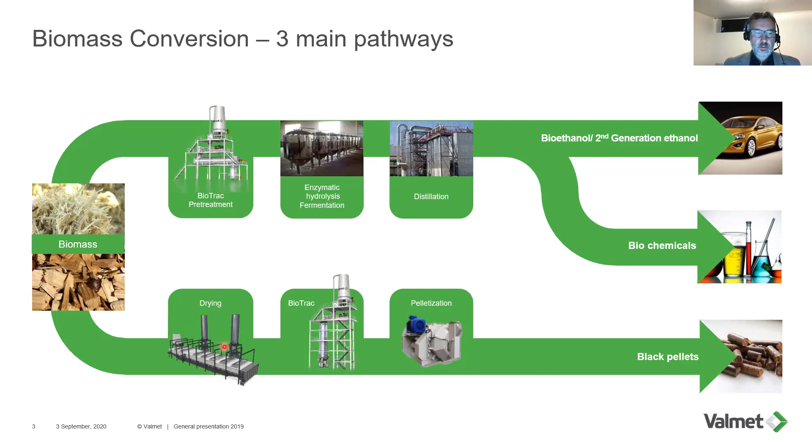I will not go into detail on the process differences between these areas, but I just want to outline some differences in how we work. In bioethanol and biochemicals, we collaborate with technology providers who have developed and scaled up their own process from R&D phase to full scale, and we deliver part of the technical solutions to fit and implement their process. On the opposite side, for black pellets, we can propose end-to-end solutions, and we can act in most cases as process supplier and equipment supplier from log infeed to final delivery.

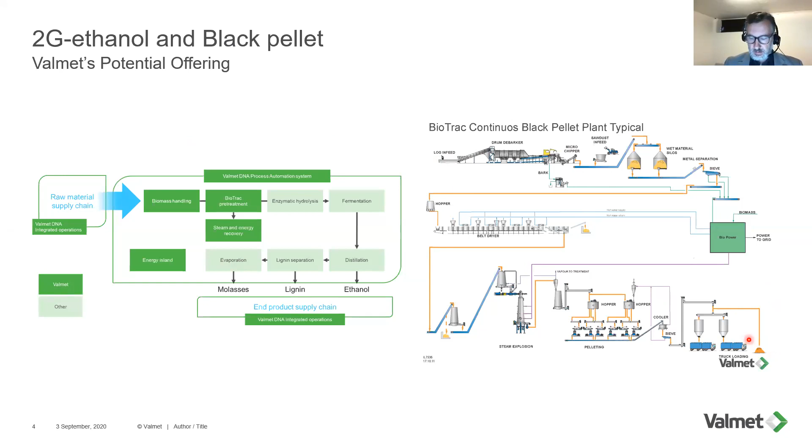In both cases, we have developed our technology from what we use within pulping and fiberboard. We have a long experience of pretreatment of biomass, more than 100 years actually, and already in the 20s, Arne Asplund worked with William Mason, who developed steam explosion and the steam gun. Arne Asplund further developed the technology for fiberboard and mechanical pulping.

So for wood-based applications, we have hundreds of references in pulping, mechanical pulping, fiberboard, and so on. But a part of Valmet which is perhaps less known, and has been very valuable for us, is our background in non-wood pulping. Here you can see a non-wood pulping line - I mean pulp production from straw, from bagasse, from agro residues. We're actually world leader with more than 50 references.

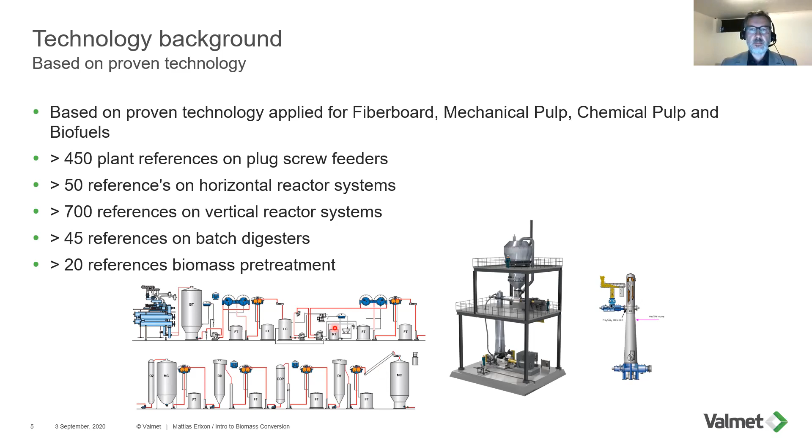This gave us good insight into challenges with this type of material, which were perhaps not known by everybody. Since about 2010, we have a reference list of more than 15 to 20 systems, and even older references from the 80s and earlier. Our strategy has been to grow slowly together with our customers to mitigate risk and secure quality. So the list of deliveries ranges from pilot scale and demo scale, to now commercial scale systems under delivery. This strategy was strongly related to the challenges, but also the opportunities we identified in this area.

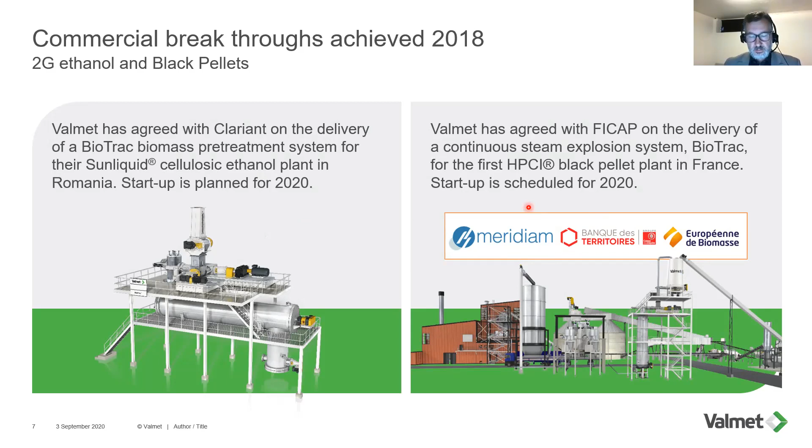All this development that was done the last 10 years, but also the last 50 years I would say, resulted in 2018 in our two first full-scale references. The first one is a bioethanol mill in Romania, whereas the second one is a steam explosion system for black pellets. These two are typical examples of a scale-up that has been done by Valmet, by our partners, and by our customer.

And it's a long trip, and we saw a lot of opportunity and challenge in this. So for Valmet, bioapplications open, of course, new opportunities, but we have also identified challenges. So it's perhaps the challenges that open the opportunities for Valmet, as we can give added value to our customer and to the project.

And when talking about scale up of new research, the focus is often put on technical challenges, but there are also other types of challenge that can be important to handle, and I will start with this other type of challenge.

The first one we identify is cultural challenge, and Valmet is a global company. We're used to work in a global market, and we have Valmet people all around the world who support us and help us in all the countries we are working. But for some companies, this can be more difficult to work internationally. One thing that complicates the game is that you have much more stakeholders involved in these projects.

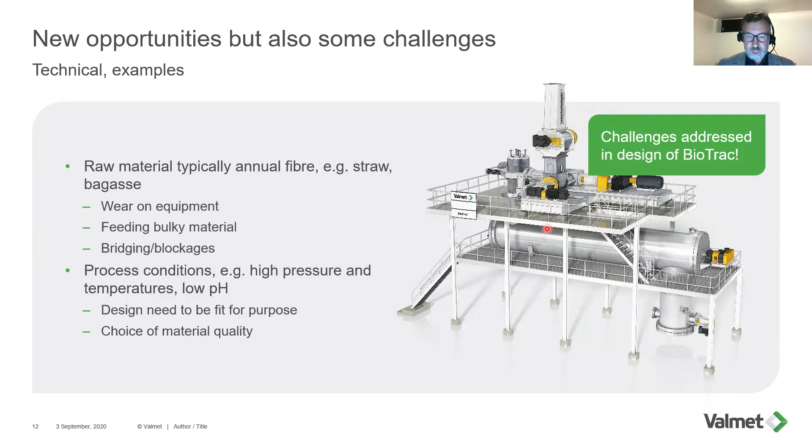However, equipment is not the first thing people think about when they develop and scale up a new process. Suppliers are often involved in the late phase of the project. It's perhaps not necessary in the early R&D phase, but as soon as the developer starts to think about applications, they should have a parallel process on how they will scale up their process. They should secure that equipment exists or is easy to adapt.

Optimization of process at small scale or pilot scale is often done with focus on yield and product properties, mass and energy balance - not on implementation at full scale, and not so often on equipment design or integration with other equipment. So this could be a challenge also if it is addressed too late.

What we can also see is that focus is put on what people think is most important, or perhaps on what people think is most interesting. And what we often hear is the word non-technology for what is outside the core process. At this stage, I think when speaking about non-technology, it's important to consider if it's really non-technology, or if this technology also needs to be adapted, upscaled, based on new premises and new materials.

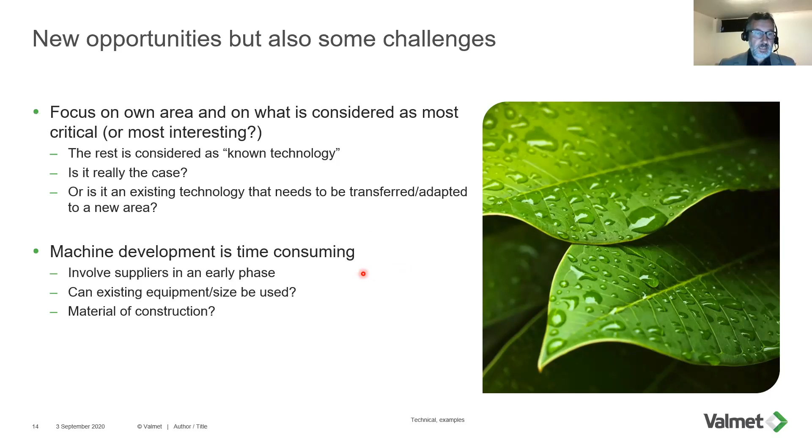An example of our upscaling is the feeding of straw or non-wood agrofiber to a reactor. To feed straw into a digester is considered to be a non-technology for non-wood pulping. But there are also differences between non-wood pulping and ethanol. An ethanol mill has a production that can be up to 3-4 times the production of a non-wood pulping line, and the pressure in the reactor is much higher.

And if you do it in the wrong way, there is a big risk for blowback also. The technology is however quite similar to what is used in mechanical pulping of fiberboard, for example - it's plug screw feeder based feeding. But there are few actors that actually know how to feed straw or bagasse in a proper way. And as a global actor, Valmet is the main actor in this area.

If you look backwards, you can see that feeding has been one of the issues for some of the first deliveries. It has often been based on designs that were perhaps not ready, but often considered as non-technology. With our background in non-wood pulping, we had broad experience handling bulky materials and existing challenges. So 15-20 years ago, in the middle of the 2000s, we started to develop new technology to develop feeding of agro residues.

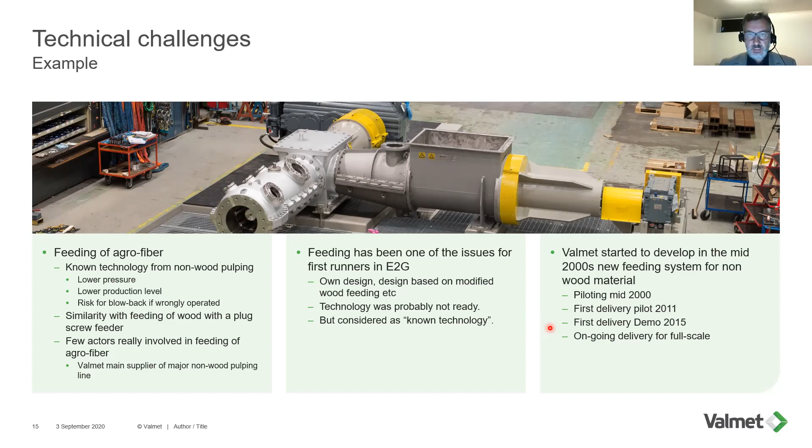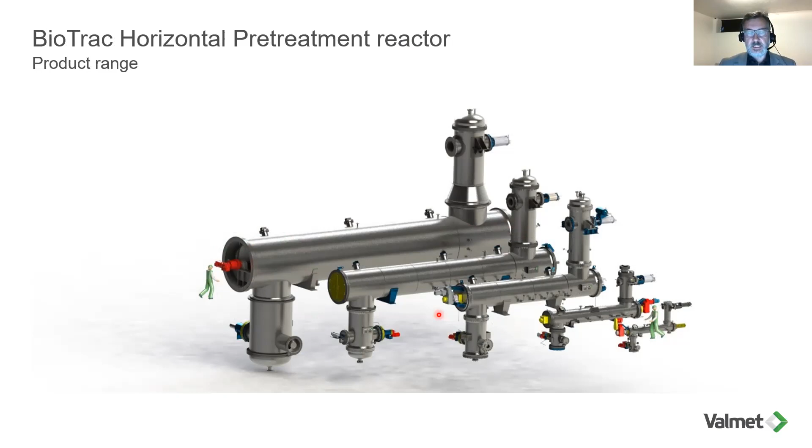As I said earlier, an important step in scaling up a process is to validate the technology at an adequate capacity level. With equipment and technology that's scalable, it's easy to make it work in a pilot, but you need to be able to make it work at full scale too. This can be done in different ways—pilot trials to verify the technology, or at our technology center we have our own pilot and also open plant, depending on what you need to test. A demo plant can also be necessary to verify performance and runnability over the long run, to see what happens when you run for one to two months in a row.

You need to validate each step, but also how the whole process is integrated. Optimizations are often made step by step, but not based on the whole process runnability and integration. It's important not to underestimate the development need for scaling up a process. If it's not done well, in the worst case you may need to start very nearly from scratch. This is perhaps not as important for minor changes in a pulp mill, since mill trials are often possible, but when it comes to emerging technology with high capex, it's very important to de-risk the technology as much as possible.

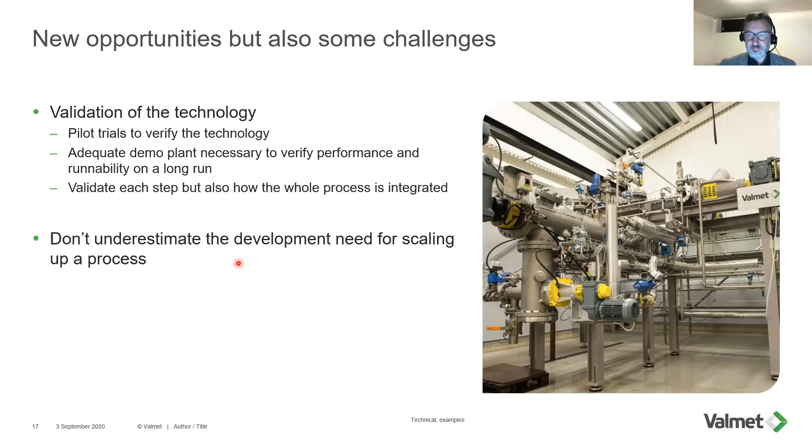To summarize, there are some critical aspects in scaling up new technology. As named at the beginning, commercialization, business model, and risk handling are very important. On risk handling, it's both technical risk and business risk, and project risk too. It's important to validate the technology with relevant equipment, and upscaling should already be included early on. You should try to involve suppliers, even if it's not always easy to involve all of them. In the end, the goal is to decrease risk, both for the technology and for the project and business—you want to have a mill that runs.

Opportunity and challenge come together, and if a challenge gives you a possibility to add value to the project, it will automatically open opportunities. This has also guided our strategy within biomass conversion for the last 10 years, in how we've organized ourselves. Through our collaborations with partners and customers, and parallel development of the technology, our technical readiness for full scale is good in this area. We've also built a new technology unit in Valmet to serve this new area—the Valmet Biomass Conversion Technology Unit. This makes it possible to work in an agile way with our customers, while at the same time we can use the whole of Valmet to support the project, with a strong project organization within Valmet that makes this possible.

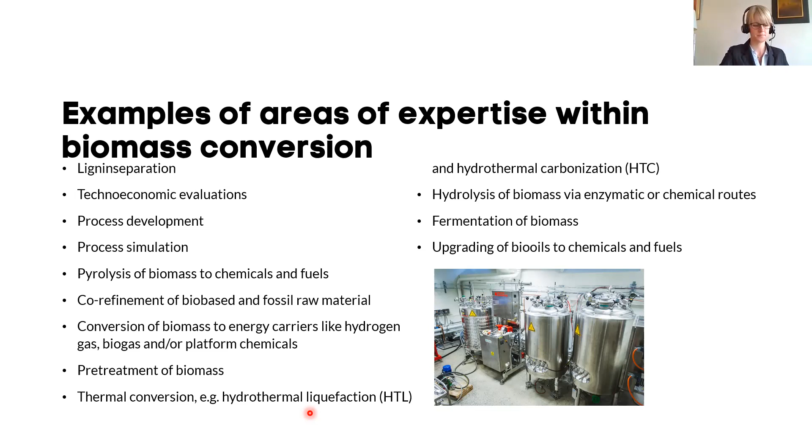Let's look into some of our business and examples, starting with RISE Energy and Technology Center in Piteå. The slurry hydrocracking pilot plant is a test bed established in 2017. Slurry hydrocracking is a refinery process, typically used to upgrade vacuum residue, the crude oil with the highest boiling point. The feedstock is mixed with a catalyst, then heated and pressurized under a flow of hydrogen.

However, this technology can also be used to upgrade bio-based oils together with fossil oils. The oxygen in the bio-oil will be reacted with hydrogen so that water is formed. What's special about this pilot is that it can operate continuously, and it can do this at an industrially relevant scale.

Slurry hydrocracking of bio-oils in a complex refinery is a collaboration project run by Chalmers, who did catalyst development, by Preem, who contributed refinery expertise, and RISE, who did the continuous mode upgrading in this slurry hydrocracking pilot plant. This was all funded by the Energy Agency.

They recently published their results in Energy and Fuels, showing that it is possible to do successful upgrading of pyrolysis oil with heavy fossil feedstock. They saw that diesel range products were formed and not much coke was formed. If you want to find out more about this, please contact Linda Sandström.

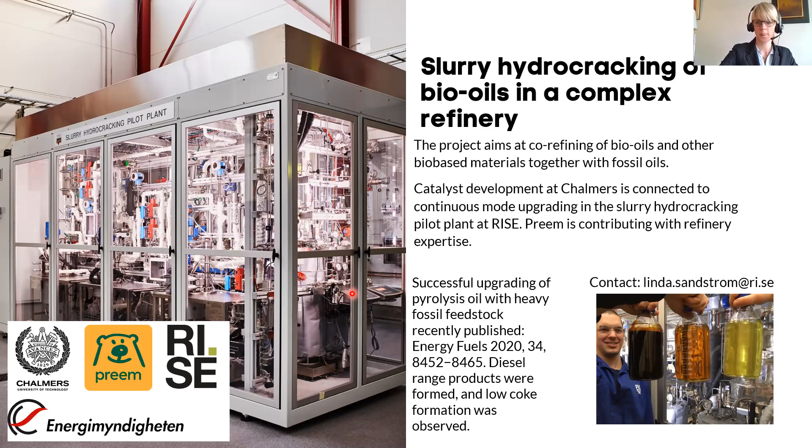This is a thermochemical pretreatment pilot, consisting of a 40-liter reactor and an expansion tank. Various types of biomass can be treated in this reactor with high pressure and direct steam. The biomass is then opened up and made more accessible for subsequent processes.

This one was used in a project called Mobile Flexible Industrial Processing of Biomass. This was a Horizon 2020 project led by VTT, aiming at developing and demonstrating mobile solutions for treatment of underexploited agro and forest biomass residues into products and intermediates.

For the project as a whole, five different technologies for mobile small-scale processing were identified: pelletizing, hydrothermal pretreatment for saccharification, hydrothermal carbonization and torrefaction for fuel, and slow pyrolysis for biochar. They were all demonstrated by industrial partners.

In this project, RISE participated and did life cycle analysis studies on pelletization, and also led the evaluation of the business cases. We also participated in the pilot part of the work.

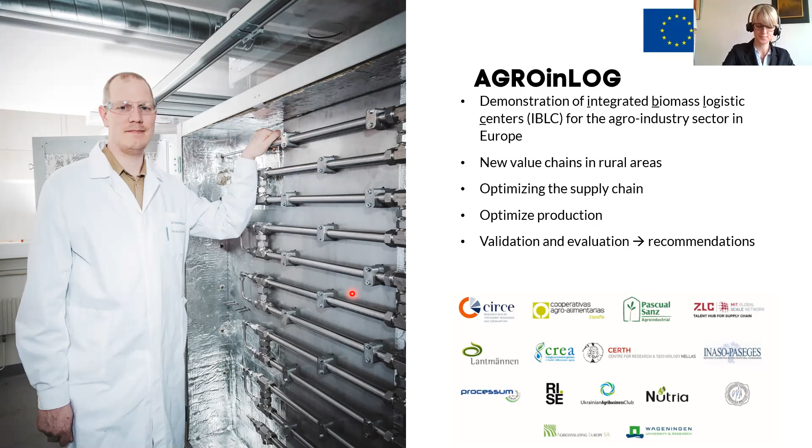Let's move further south to our lignin experts. This is from Bäckhammar. The facility was established in 2006 by Innventia to demonstrate the lignoboost process, for which Valmet owns the IP. At LignoCity there is the technique for separation of lignin, as well as knowledge about how to valorize it via different processes, and it is a unique testbed with respect to its upscaling possibilities.

LignoCity 2.0 is a 3-year project aiming at commercializing sustainable processes and products. It is about accelerating business processes. This is funded by the European Regional Development Fund, Tillväxtverket, and Region Värmland, and it's led by RISE, but we also have Paper Province, Närsam, and Karlstad University involved.

An offer has been developed, containing 3 different packages that offer support to reach the goal as fast as possible at minimum cost. The first package is called Go Aware, about generating knowledge so that you have a more solid foundation to stand on to make legitimate decisions about potential first steps. The second one is called Go Product, which could be seen as the step between lab and full scale, about producing a first product at minimum cost.

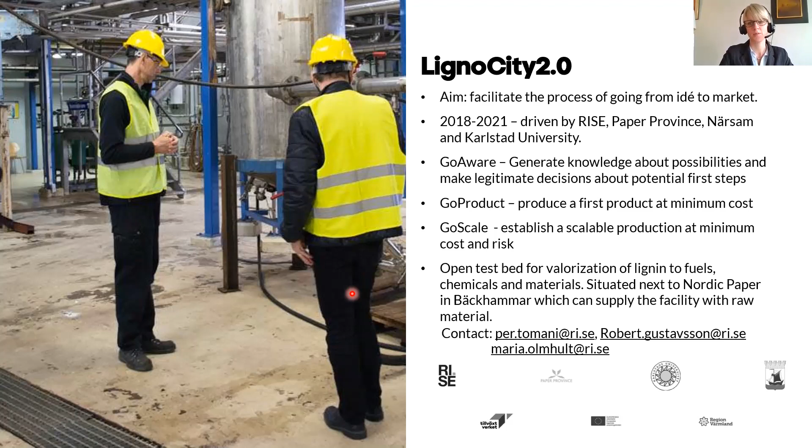If you want to find out more about this, feel free to contact Per Tomani or one of the project managers, Robert or Maria.

Okay, so it's time to summarize. We have a lot of expertise within biomass conversion, and we work in many different ways, and we have several test beds available to use. Please work with us on product and process or method development, and thereby using these test beds and pilots, it is possible to reduce risk, have lower cost for development, for instance via decreased company investments, and potentially also shorten time for market. So let's continue working together.